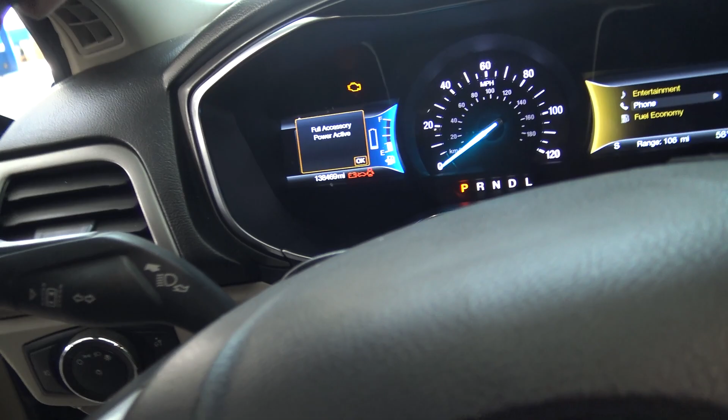What's going on, everybody? For those of you that recall, this is that Ford Fusion Hybrid we were working on last week. It had a replacement power steering rack installed into it, and it was setting torque sensor codes. Right now we got a lane keep assist message on the dash. It does have power steering, and it's not setting a torque angle sensor code to the technician.

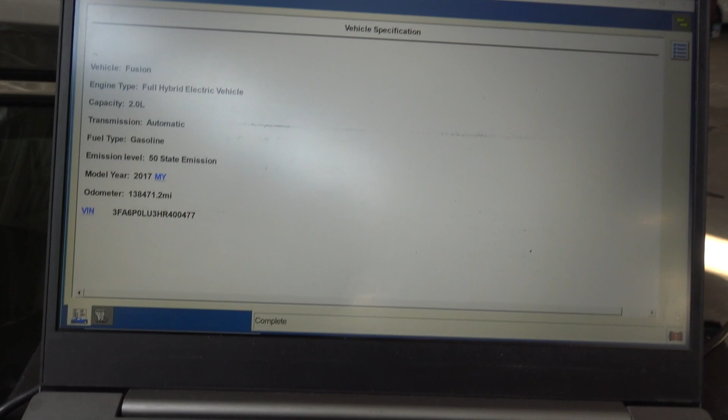So let's go ahead and see what codes we do have. I'm expecting a U2100 code, that's going to be like the module configuration incomplete or something like that. This is a 2017, so we're going to go do our self-test here.

Now the first vehicle I worked on today was an interesting vehicle. It was a 2012 Dodge Ram 3500 cab chassis that had an intermittent no crank, no start situation.

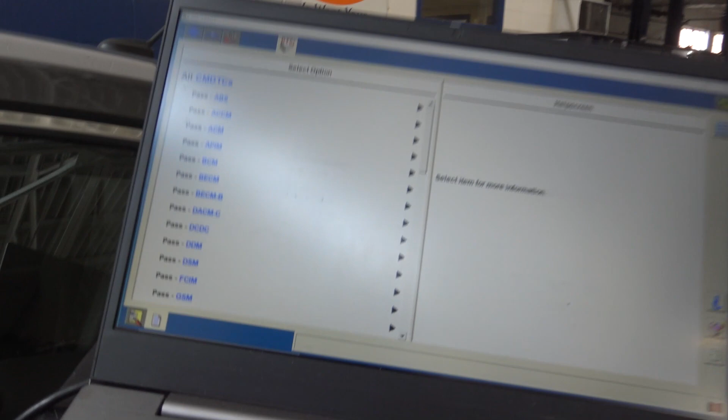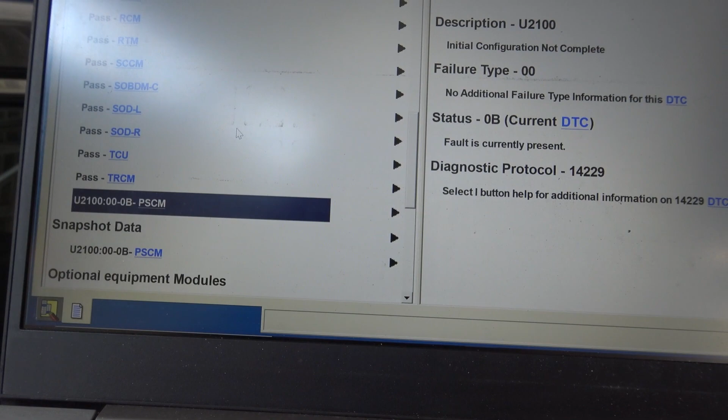All right, so let's go ahead and see what we got going on here. There's our U2100 on our power steering control module. Just so you see our side option detection, let me check where's our lane keep assist. I don't think we have any other modules or other codes going on here, just this U2100. So let's go ahead and configure this thing.

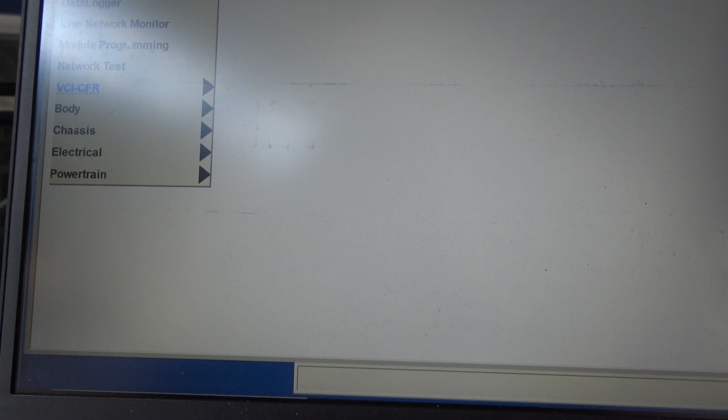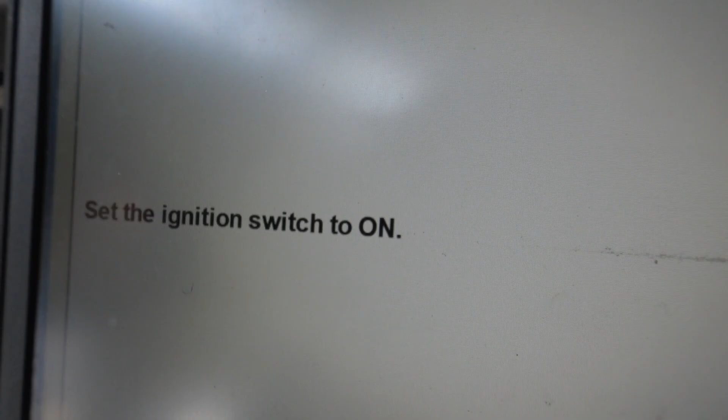So we're going to go to module programming, and we're going to go to programmable module installation and PSCM. Last time I tried to do this, it kept on - I don't know if it would error out, or I think it said complete but it wouldn't learn. Make sure the key's in the run position. Check, and yes. I'm looking forward to this thing going online and pulling the files, that would be the best. Otherwise, we may have to enter manual as-built data. That wouldn't be cool, but you never know.

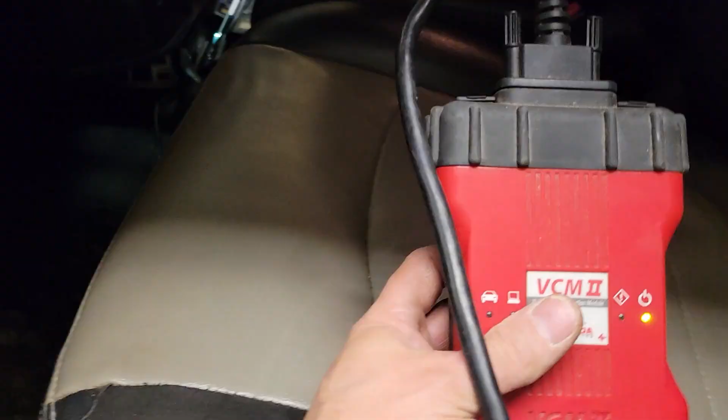While we're waiting for this to run its code scan, I want to tell you that I also used a Ford VCM2 as my interface device for that Dodge Ram truck I worked on this morning. I think I have a video clip here for you to watch, but I was just checking to see whether it would work or not. I had another shop looking to get into more programming. I think they have a VCM2 and maybe an MDI, but they don't do Chryslers, so they might be looking at using one of their pre-existing interface devices to get the job done. I think it will work.

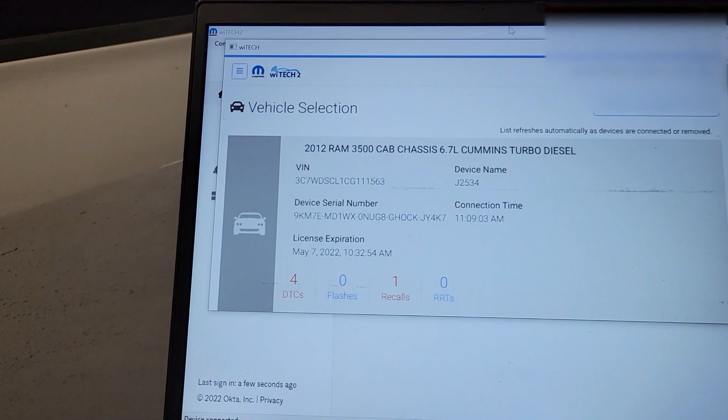I didn't do programming with it. There's a couple messages that pop up, and I think it's because it's not a Chrysler verified device, like the Drew Tech CarDAQ-Plus 3 is a verified device from Chrysler. So we'll see what they say about that, or if I get the chance to do a program, I'll go ahead and do that.

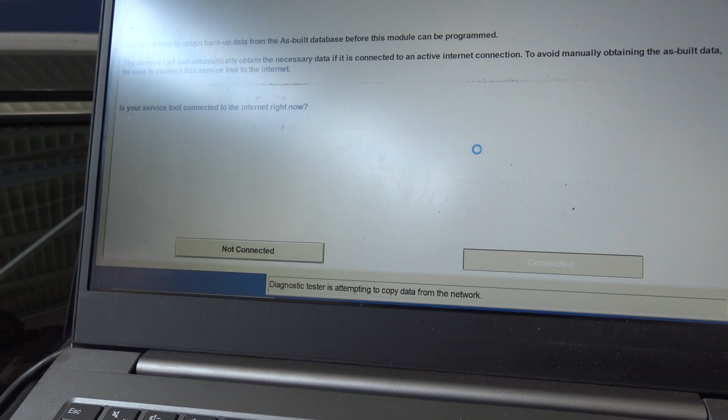All right, we have ourselves unable to obtain valid part numbers. Would we like to try again using the database? Yes, we would. Hit yes, and we're going to hit connected because we are connected to the internet. And we're waiting for this thing to download whatever it needs to download and find its files. There we go. Set ignition off. Install a new module in vehicle, which is already installed. Set ignition on, and check.

Set ignition off. We call these the J2534 jumping jacks, right? Set ignition on. Check.

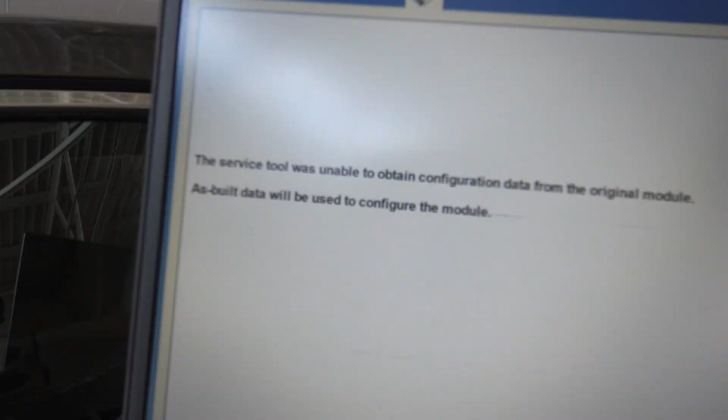And it's definitely doing something this time, as you see. Just so you know, as it's doing this, the cluster turned off and it just turned back on, saying it couldn't pull the information off the original module, so it's going to use as-built data. We're going to hit check mark and go for automatic as-built. That's always the best option if I have my choice. It should configure it pretty quick here.

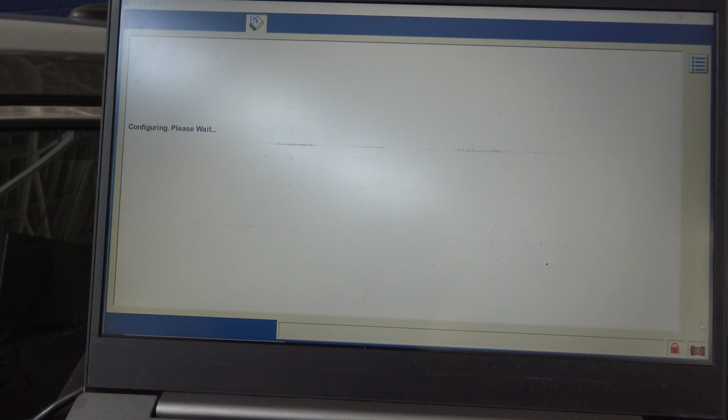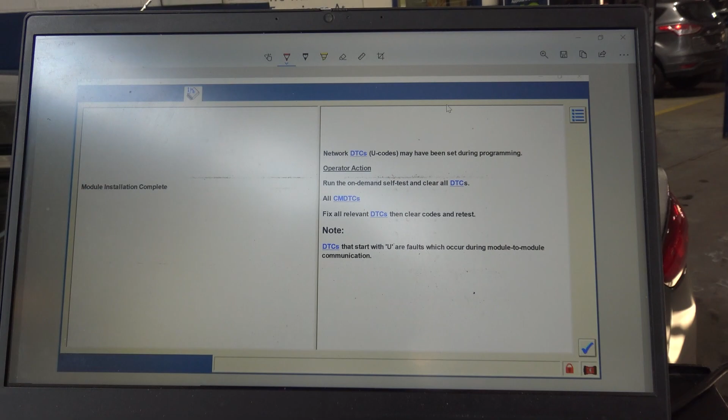Module installation is complete. This is a great thing. I'll take a screenshot of that for me and my customer. You guys hear me say all the time, a picture's worth 1,000 words, right? So there we go, set ignition off. And check, there we go. I'm going to take a screenshot of this as well.

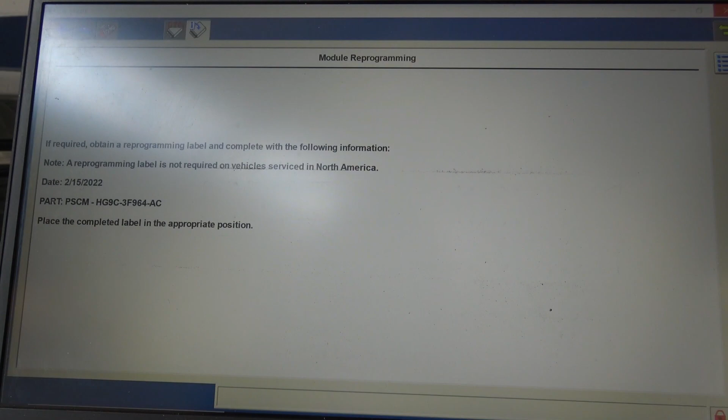And hit the next button, check mark. They call the little blue check mark a tick. So now I'm going to go ahead and do my DTC scan. Go ahead, key back in the run position. Check, this will take a second.

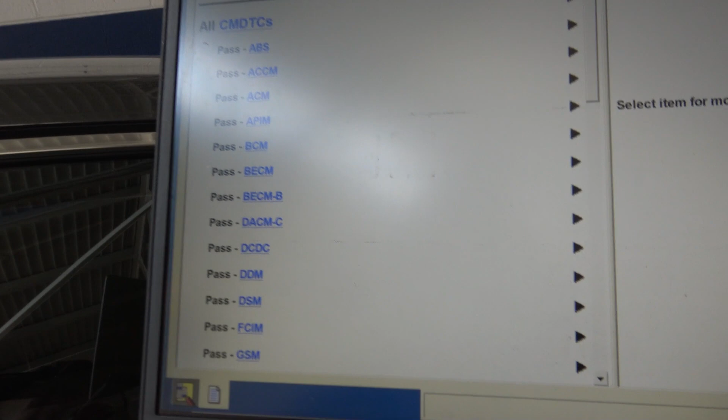All right, we've got our DTC list here. We got rid of our code in our power steering control module. That's good, no codes there. There are still some other procedures we have to do. I think our torque sensor learn, and let's see, body, braking.

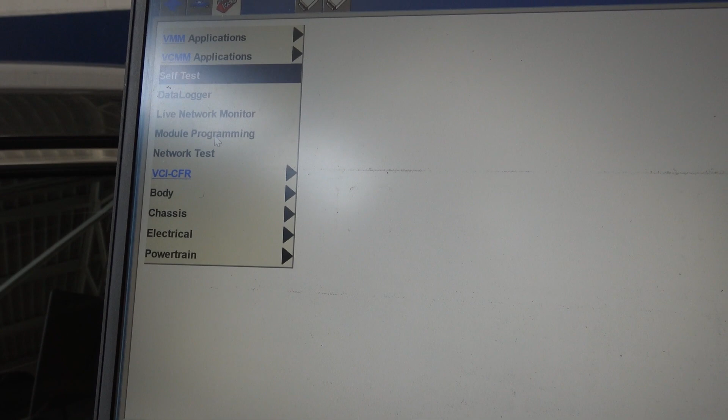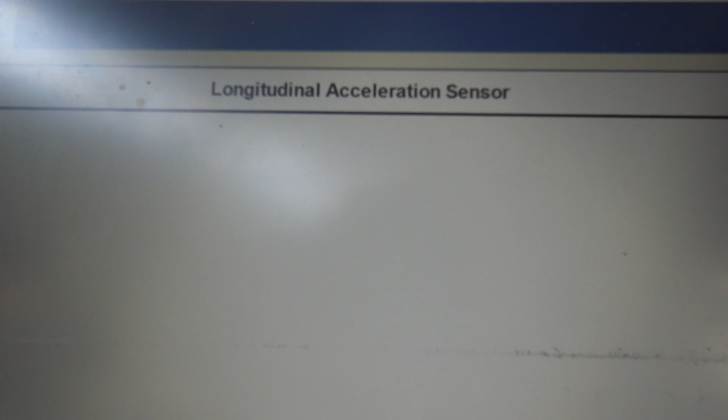This is the longitudinal acceleration sensor. And then I think there might be a torque sensor trim. I may have to go look up my service information because that was last week and I forgot.

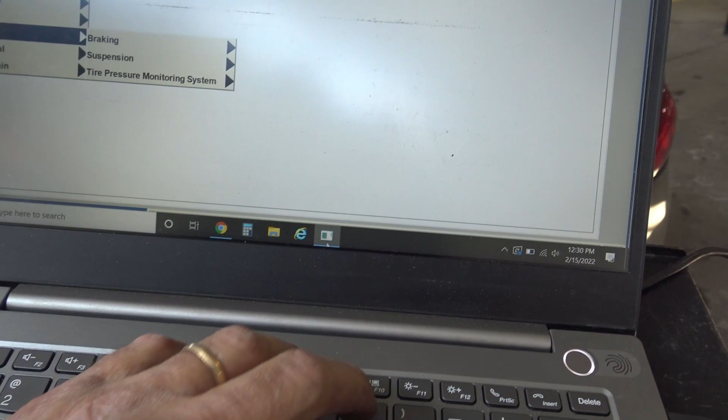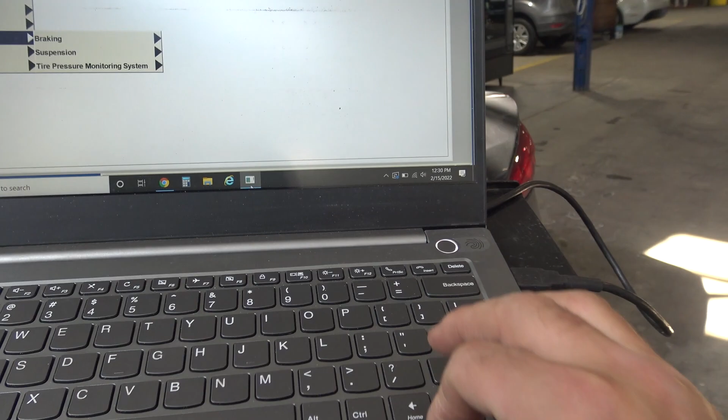Well guys, I was reaching over to touch a button over here on my computer keyboard, and I think I had my sleeve touch my function and Windows key while I hit something over here. I'm not sure, but I locked this computer up solid. I mean, I don't even think the time's changing. We'll see if the time is changing or not, but I have no mouse operation either from my mouse down here, keyboard up there, escape, delete. We can try the good old-fashioned Control-Alt-Delete. Let me see if I can do that with one hand. I'm going to hold Control-Alt-Delete here.

We are frozen up. I don't know if it's an IDS problem or a Windows problem. This isn't a touchscreen computer, but that stinks. What I was in the process of doing is going to go look up that procedure for that power steering control module replacement. Let me hold the power button here.

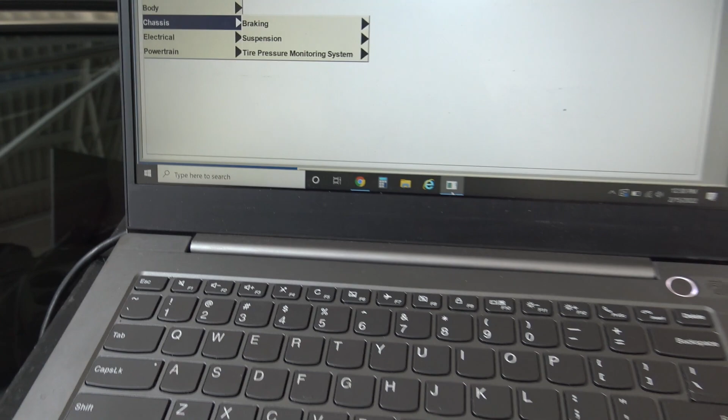We're going to see if we can turn it off and start all over. So this computer has been really good. This is the i7 Lenovo. I think i7 is quite a bit overkill, to be honest with you, but it's one of those ThinkBooks or something. It's not a Toughbook or nothing like that. Pretty simple computer, but you don't need this much horsepower. I tell you what, the battery goes dead fast on it. That's my big complaint. So we're going to try this again.

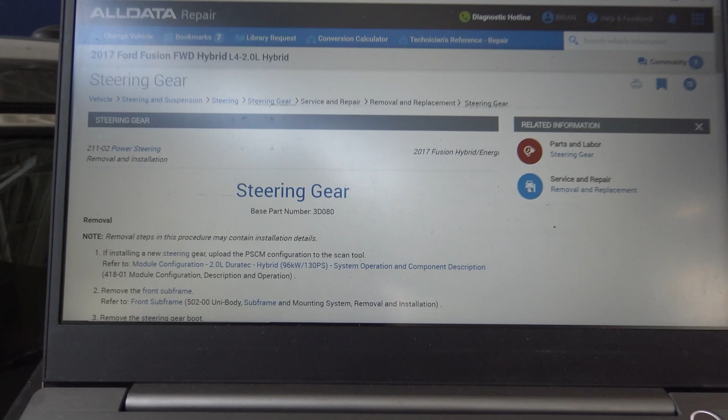All right, we're back in there. So here's the steering gear procedure per ALLDATA here. Usually anytime you're doing any programming, it'll tell you what to do at the last step here. It says if a new steering gear was installed, upload the PSCM configuration data, and then refer to this module configuration.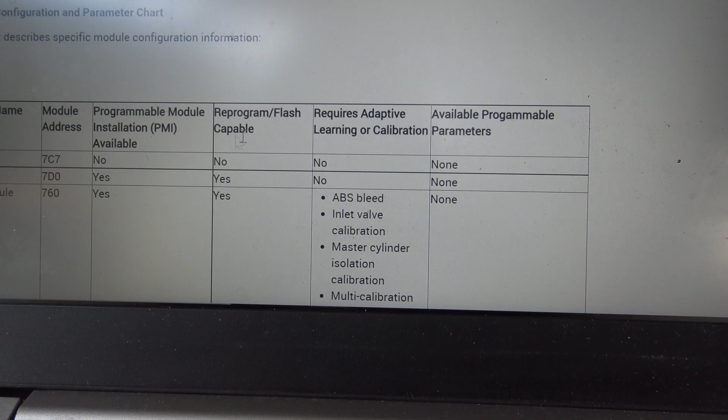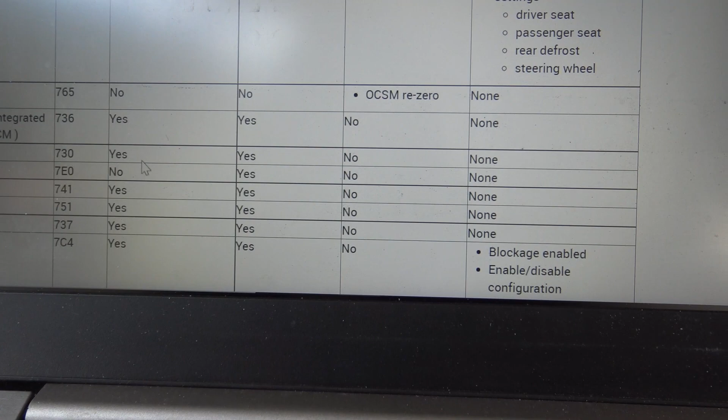And this doesn't give us a whole lot, to be honest with you. We got this list, and at the top of the list, it tells you what the module is. Does it need PMI and flash reprocess or flash program capable? Means can you update it with a flash update? And then does it need adaptive calibration or programmable parameters? So we're going to scroll down here to our PSCM, and it does require programming, and it is flash updatable. But you see here we don't have anything there.

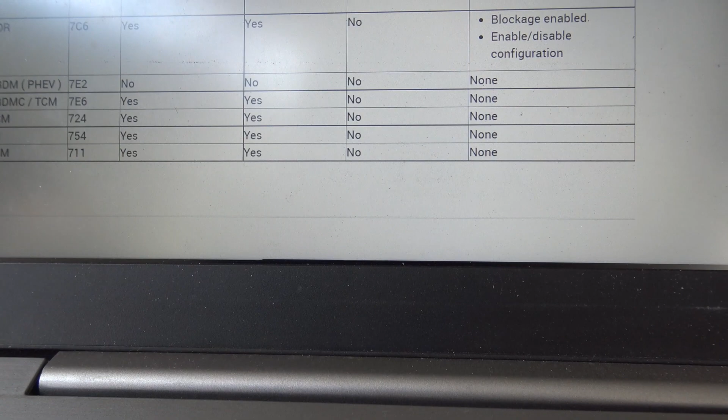So I thought I'd have like a torque angle sensor code or torque angle sensor reset or something like that, but I don't see anything poking around in Ford IDS. I gotta go launch IDS again because it crashed on me. Hopefully it remembered my session because I had all my, what do you call it, your vehicle session log. I wanna make sure I have that stuff in there. I'll turn the key on, make sure we do have power steering here.

And we do have power steering. Customer already told me that was good. And we're going to see if we have any messages here. Key fob battery low, vehicle's on, and we're looking to make sure we got that lane keep assist message gone.

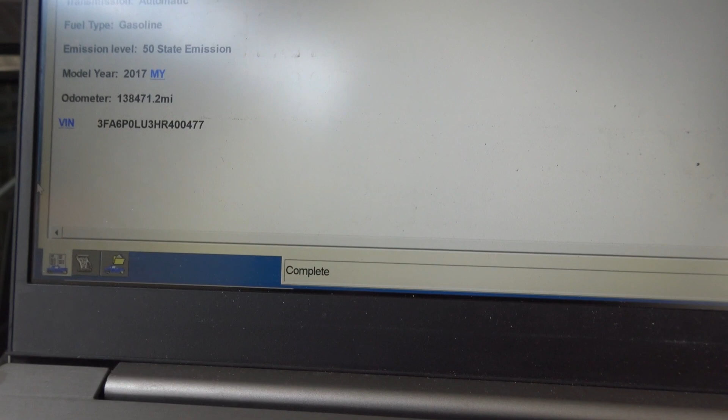And we do. So looks like we're in good shape, guys. And we're back in our vehicle. I want to take a look. It looks like we do have our complete list. This is the history of this vehicle, what we did this session. So we didn't lose that information.

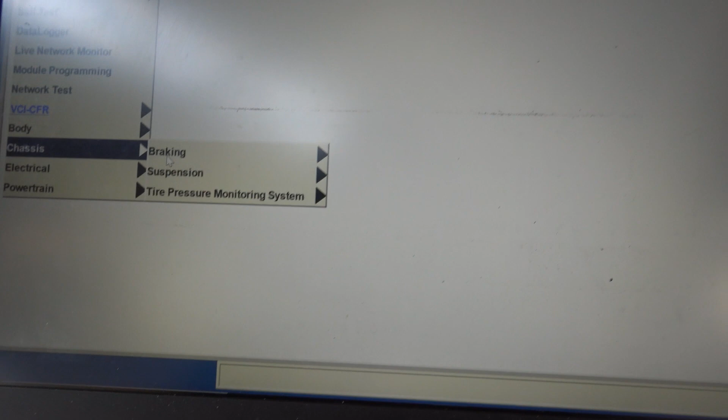I want to go back here and show you guys. Usually if there is a function for the steering, it'll pop up over here somewhere. You'll see it in suspension or electrical powertrain. You'll see it somewhere, usually in body or chassis. I sure would expect chassis. So I think we're all set here.

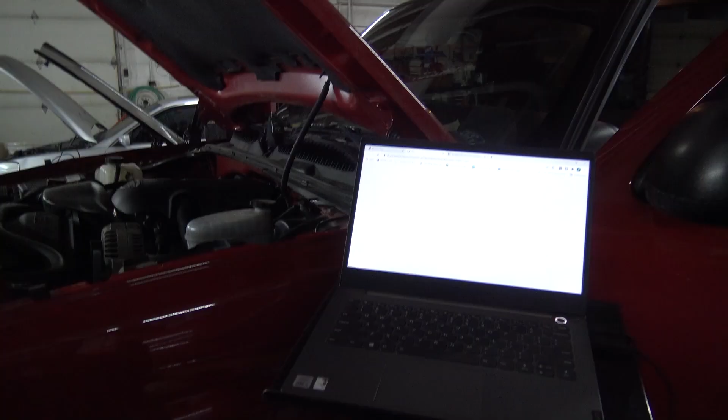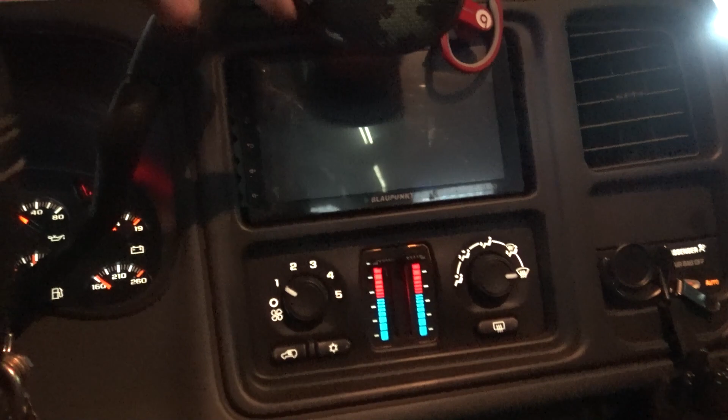Now it's not turning on, so I'm going to go ahead and try and program this without pulling the radio fuse. But if that radio was coming on, I would definitely be pulling the radio fuse, which is up under over here. I believe it's this guy right here. That is the radio fuse on this vehicle.

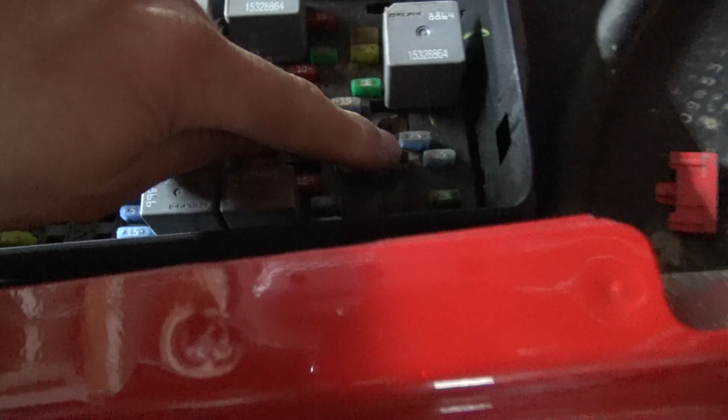So we're going to go ahead and launch Techline Connect. By the way, a lot of people have been saying they've been having tons of problems with Techline Connect lately. I haven't, that I know of. It's been working all right for me. I've had a few other jobs that I'm not posting here on the internet, but we've been using it no problem. So we'll see what happens if this gets started.

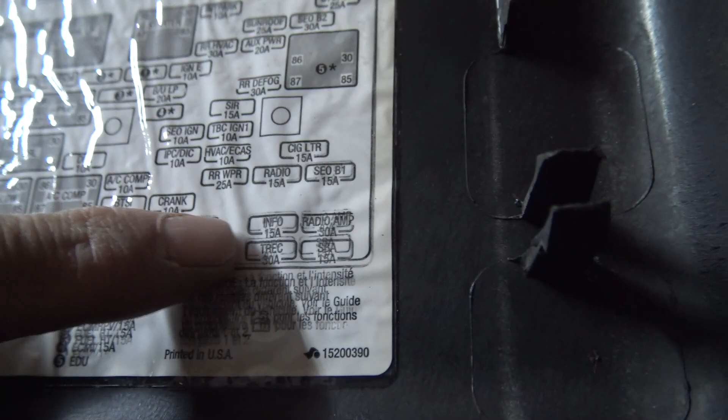I'll find out where that radio fuse is for sure. This is all blurry, hard to see here. Yep, the radio up there in the corner. Actually, that's not it, I take that back. That's a radio amplifier fuse, and this is the radio fuse right there. So let's see, 215s, 315s, this guy right here is that radio fuse if we end up having a problem.

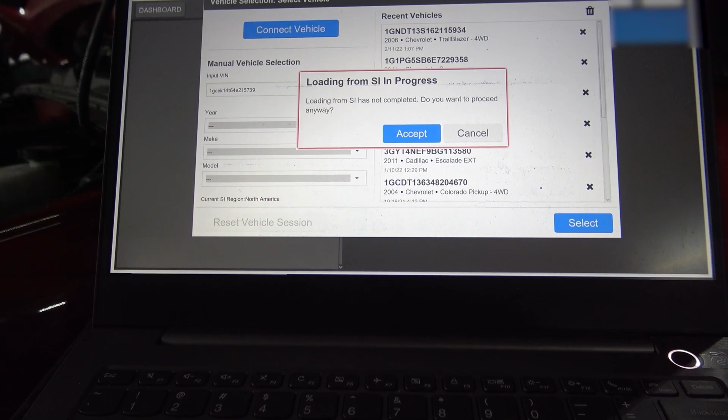And this is a situation here where I got the VIN already typed in. I'm going to copy that, paste it in here, and select. And we got to figure out what this thing is. It's a Chevy Silverado, it's not an Avalanche, Suburban, or Tahoe. Accept, accept.

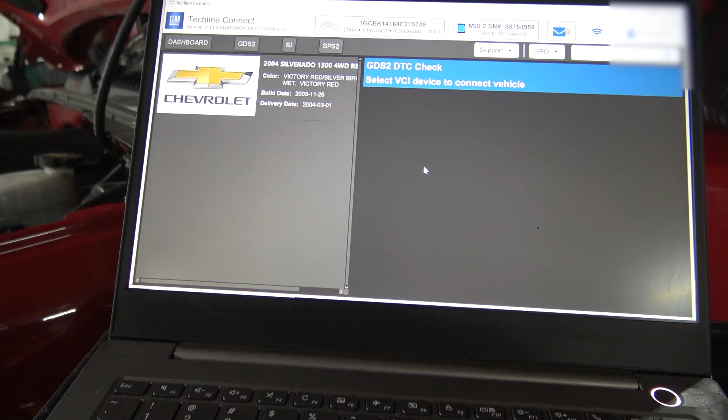I'll go ahead and start our SPS process here. And like I said, I'm really curious to see if we have any issues. If it errors out as it tries to go start programming, I will pull that radio fuse right away.

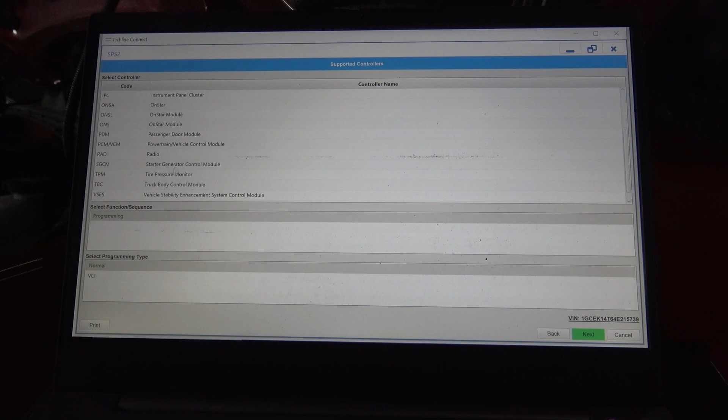Standard fare here, replace and program, and next. Find our powertrain control module. Next. And we'll go ahead and take a picture of this for our records. Always a good thing to do.

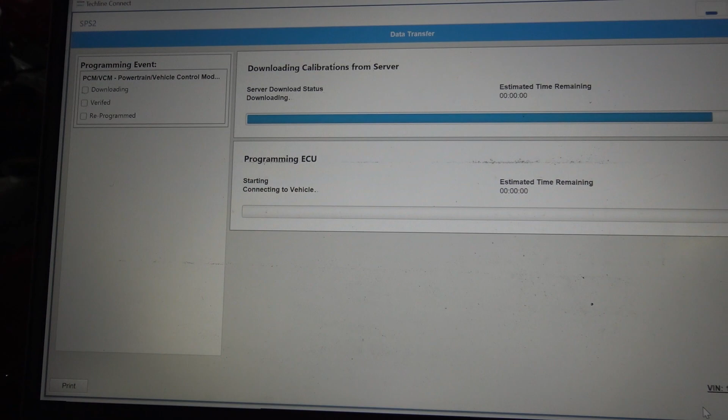And we're going to start programming. I do have a little bit of a weak connection here with my hotspot. I am using my other hotspot. I think I ran out of data on my phone plan, so I only got 2 bars here.

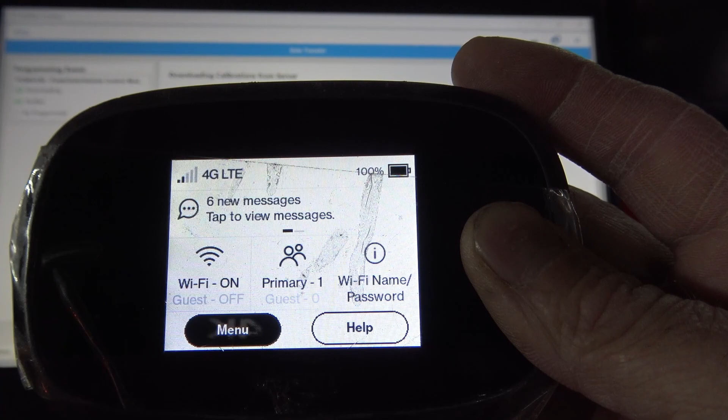And there we go, our warranty claim code popped up. I almost guarantee it's because of the weak internet connection I have here. I always have some issues at this shop.

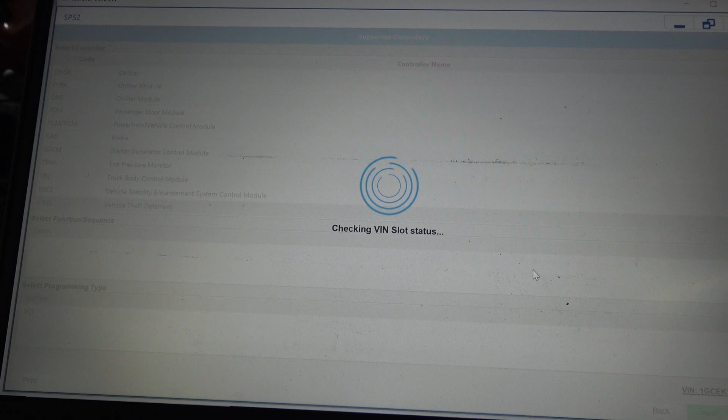VTD, vehicle theft deterrent learn. And next, unfortunately this is going to burn up 10 minutes. We got to get the security light off first, and then we'll go ahead and pursue anything else. All right guys, the vehicle theft deterrent learn took care of this, no problem. We were all set there.